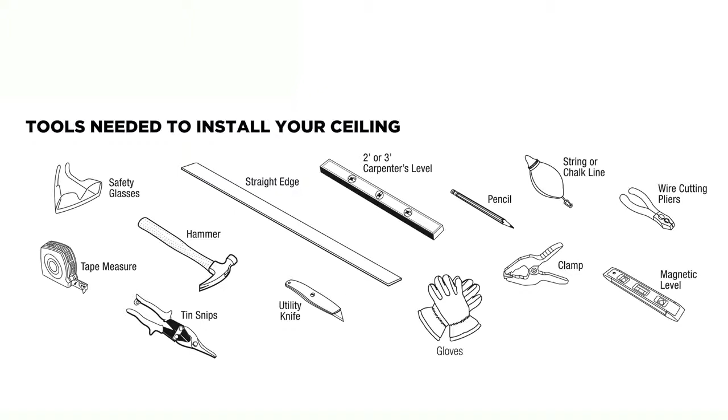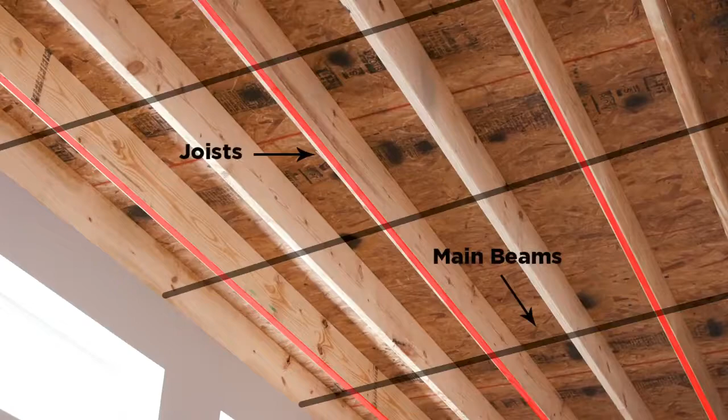Site preparation. Before beginning your installation, you'll need to identify the direction of the joists. Main beams typically run perpendicular to joists. If you have existing drywall, here's how to identify joist direction.

Locate hidden joists using a stud finder or by tapping on the ceiling until you hear a solid thud. Mark this location. Repeat to locate remaining joists. Mark joist locations with chalk lines.

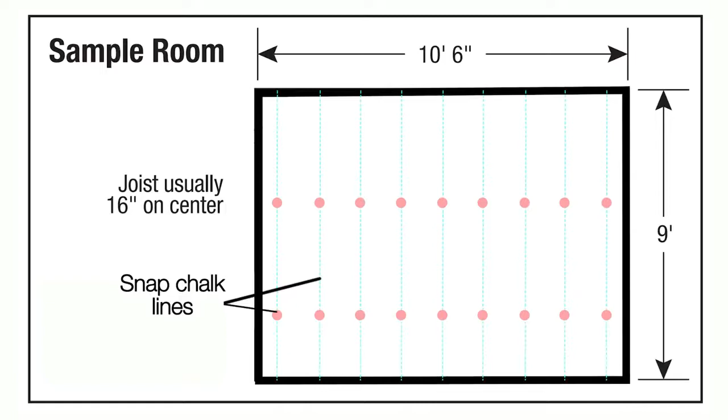Planning your layout. We recommend creating a layout of your ceiling before beginning your project. Visit the drop ceiling calculator on our website for additional guidance.

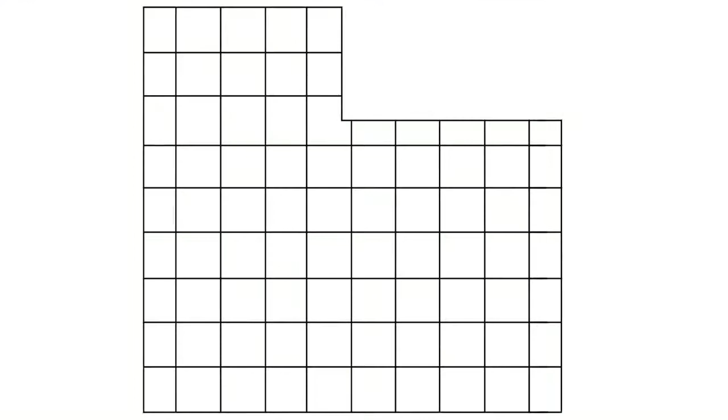For the best appearance, border panels should be the same size on opposite sides of the room and as large as possible. Use your room dimension and the following formulas to plan your space. Pause the video here to review the worksheets.

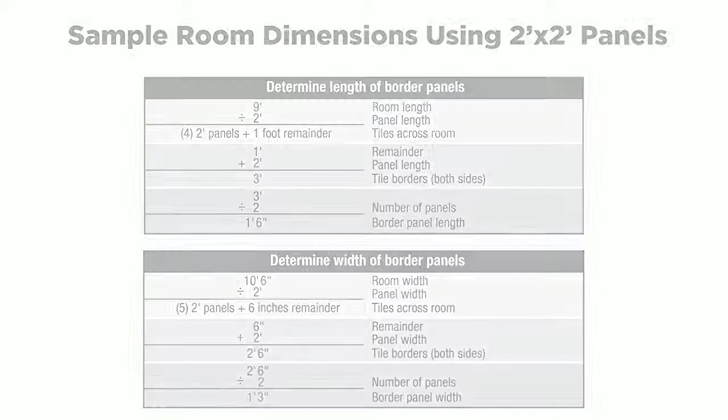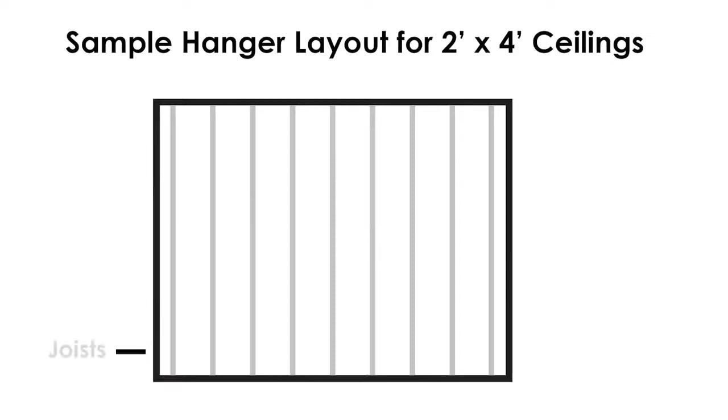Hanging point layout. Now that you have your tile layout planned, you'll need to lay out and mark your hanging points. These hanging points will support your main beams. The first row of main beams in a 2-foot by 4-foot panel installation should be hung the width of the border panel size away from the wall.

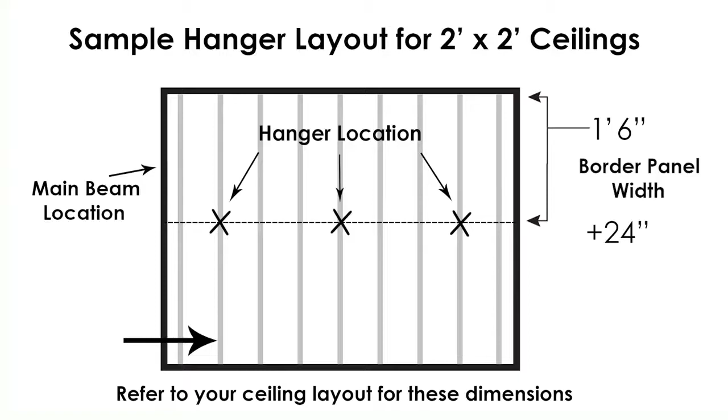In a 2-foot by 2-foot panel installation, the first row of main beams can be hung the width of the border panel or a border panel width plus 24 inches from the wall. Please refer to your ceiling layout for these dimensions. Remember, hanger locations should not be spaced more than 4 feet apart in any direction.

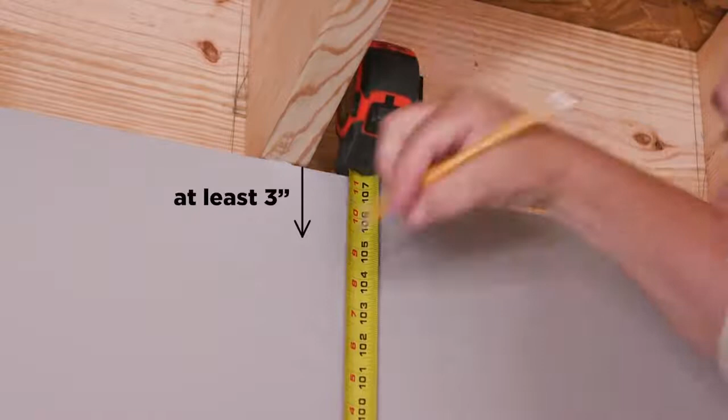Installing wall molding. The first step to installing your grid is establishing your ceiling height. For a typical installation, leave at least 3 inches below joists. This will allow you to get the ceiling panels in and out of the grid more easily. Identify your desired ceiling height. Then, add the height of the wall molding above the desired ceiling height.

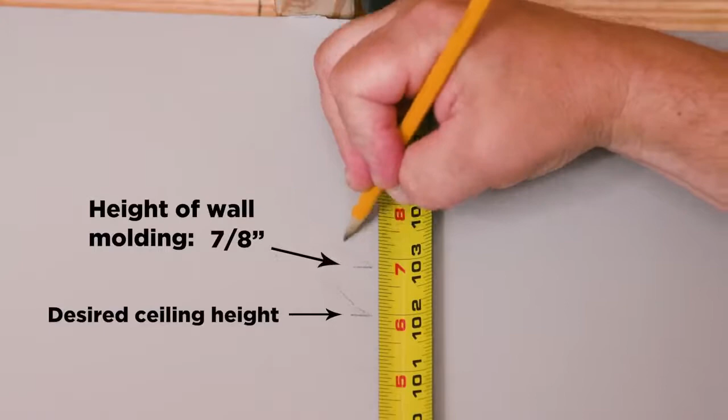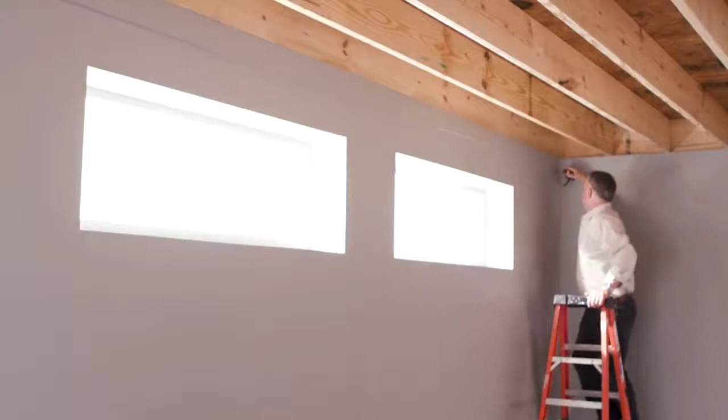Mark a level line where the top of the wall molding will be on 3 walls. This will keep the marks from being visible after your ceiling is installed. Use a string line to mark the 4th wall. Doing this correctly will help ensure that your ceiling plane is level and flat. Tip: the easiest way to establish a level ceiling plane is with a laser level.

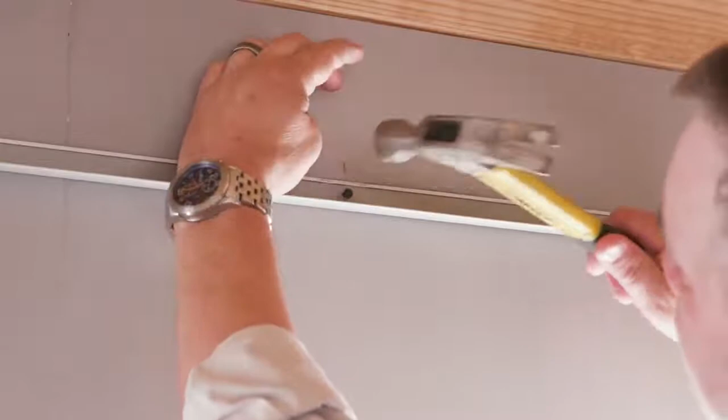Fasten the wall molding to the wall studs every 16 inches to 24 inches on center with the appropriate fastener for your type of stud or wall. If attaching the molding directly to the wall isn't possible, hang a section of main beam next to the wall as a substitute for regular wall molding. It will look the same when the job is complete.

Wall molding corners can be created in 2 different ways. Butt joints are acceptable at inside corners. Outside corners should have a mitered joint.

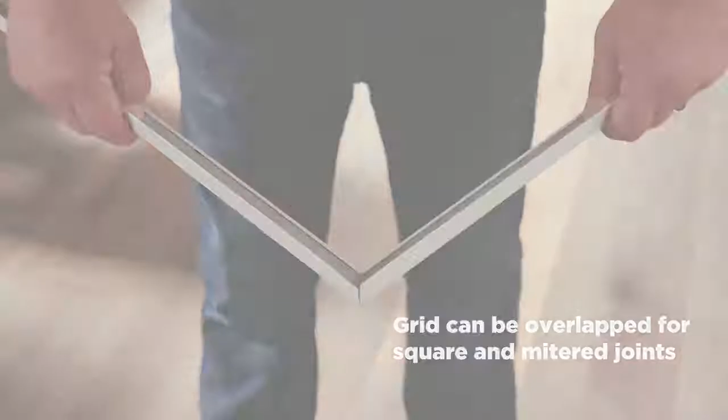Installing hanging hardware. Let's install the hanging hardware. There are multiple choices. Hanger wire. The traditional way to hang a ceiling is with hanger wire and fasteners. Identify the locations of your first main beam and snap a chalk line. Additional main beams will be spaced 4 feet apart.

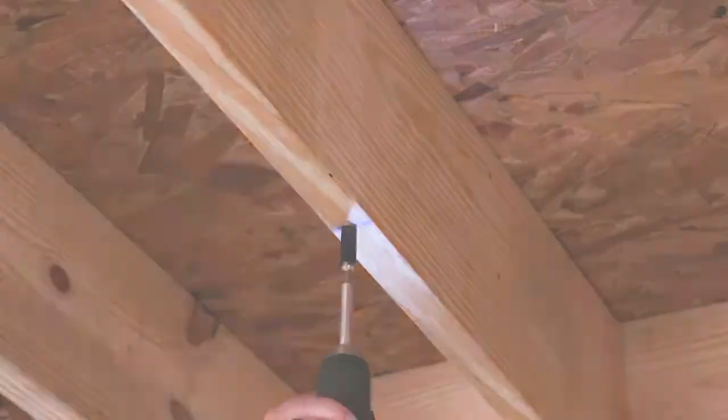Screw the wire fasteners into the joists along that chalk line, a maximum of 4 feet apart. Next, cut the hanger wire so that the length is the distance from your fastener to the top of the molding, plus 1 foot. Pre-bend the hanger wire 6 inches from the end.

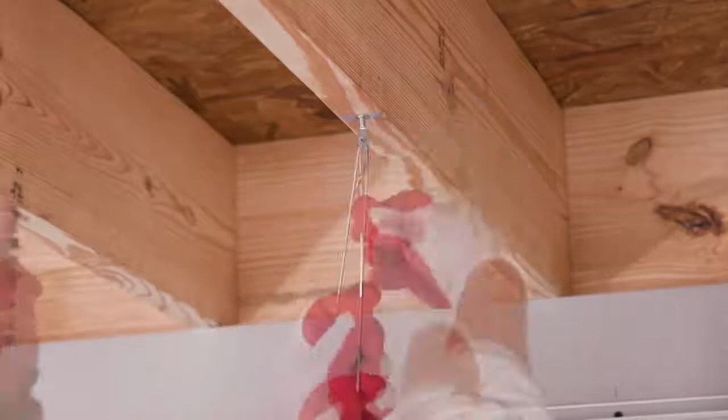Thread the bent end through the fastener and wrap it around itself 3 times. The wire is now securely attached. Do this step for all remaining hanger locations.

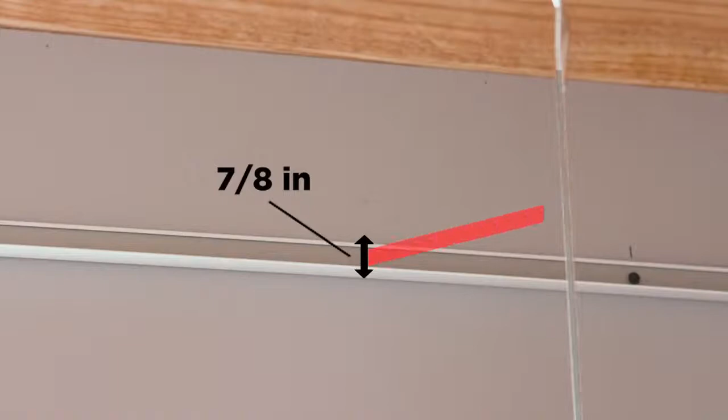Measure 7/8 of an inch from the bottom of the molding and in line with the hanging hardware. Drive a nail into the wall just above the molding. Do the same on the other side of the room. Stretch a leveling string from nail to nail along the row of wires.

Swing hanger wires over to the string line and bend each one at a 90-degree angle where they touch the string. Doing this consistently and accurately will help create a level ceiling.

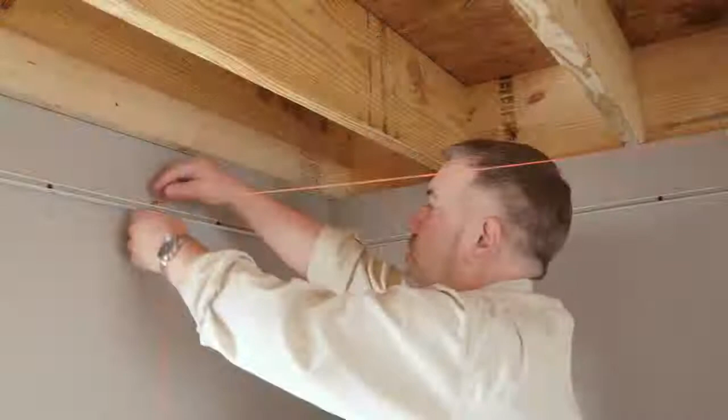Stretch additional leveling string lines to pre-bend other hanger wires. Remove leveling strings after bending the wires. Quick hang hooks and brackets.

There are a few things to keep in mind when using the quick hang hardware. This hardware is designed to be a faster and easier way to install and level a ceiling versus traditional hanger wire. This hardware is for residential use only and is designed for use with solid wood or engineered wood joists. Two hook options allow for ceiling drops from 2.5 inches to 6 inches and 2.5 inches to 12 inches below the bottom of the joists. The hardware is not for use on finished drywall ceilings.

Plan your layout in the same manner you would using hanger wire. The quick hang hardware should be spaced 4 feet apart. Make 1-inch long vertical marks on the side of each joist where the bracket will be located. Use the center hole on the bracket for alignment with the vertical mark. Hammer in the 2 tabs for a temporary hold.

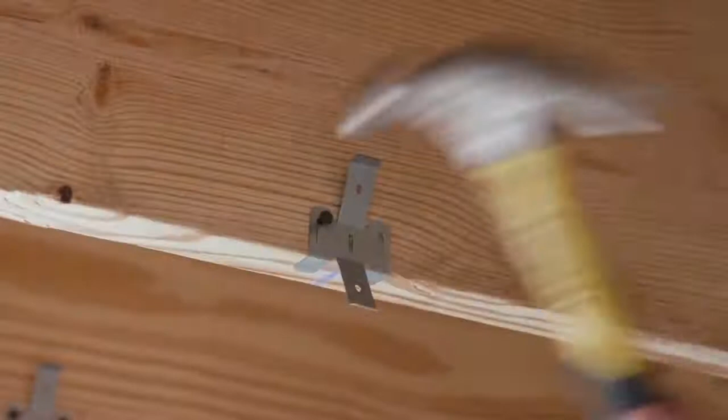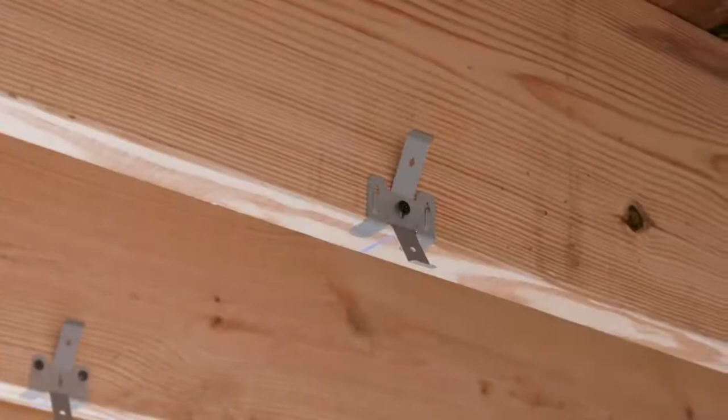Nail the bracket to the joist through the 2 openings above the hammer tabs using the provided nails. You can also attach the bracket to the joist using a single number 5 wood screw through the center alignment hole. With the brackets securely attached to the joist, insert the grid hook using the diamond-shaped holes in the brackets.

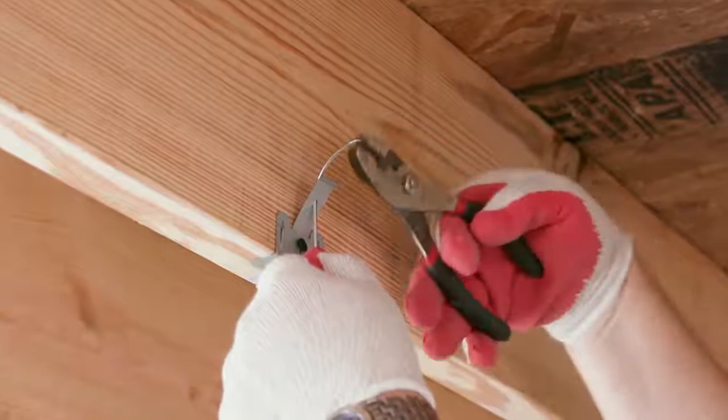Thread the small end of the hook from the back through the lower hole. Push the hook up and rotate to thread through the upper hole, squeezing the spring tabs to allow the wire to go through. Do not cut quick hang hooks. If the hook needs to be shortened due to an obstruction, the top portion can be bent by hand or with pliers. Turn all hooks in the same direction, parallel to the joists.

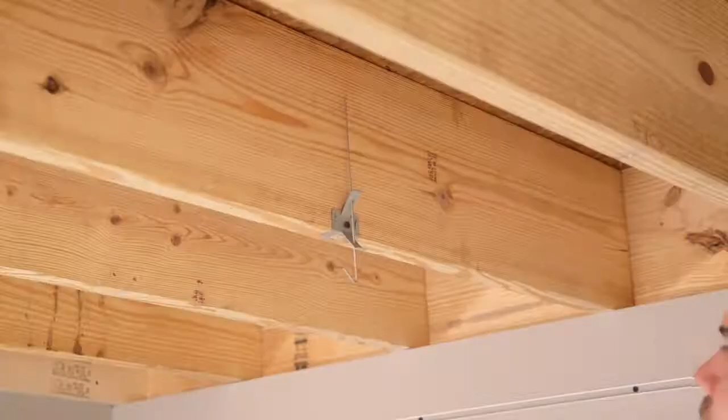Set the hooks at about the same height. The bottom of the hooks should align with the top of the wall molding. To adjust the height of the hook, squeeze upper and lower spring tabs while lifting or lowering the hook. You will do final leveling once all of the grid is installed.

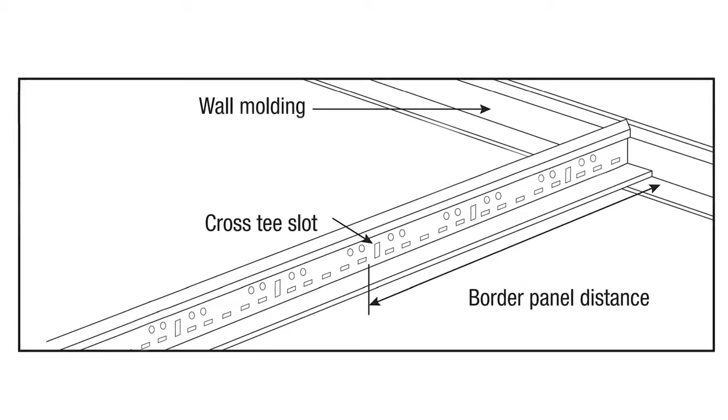Preparing and hanging main beams. You will need to trim the end of the first main beam so that a cross tee slot is a border panel distance from the wall. This first main beam should be closest to the wall. Cut the top of the grid first with tin snips, then bend the grid open and cut the face.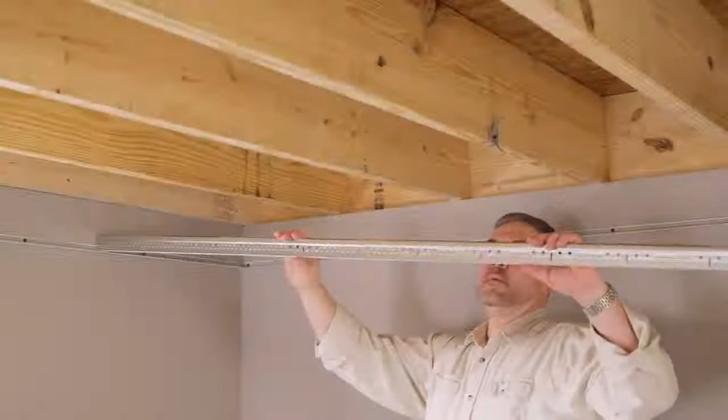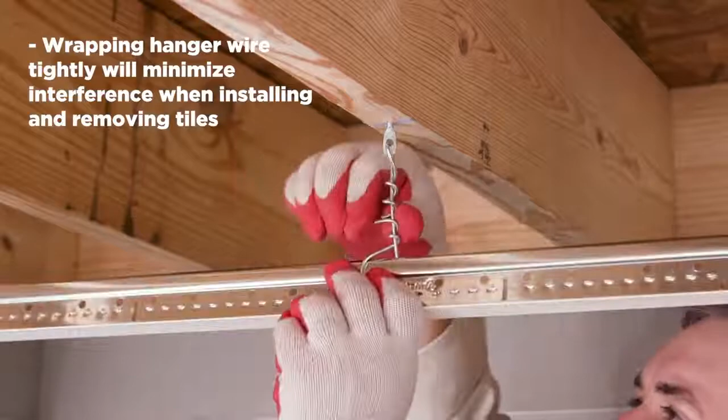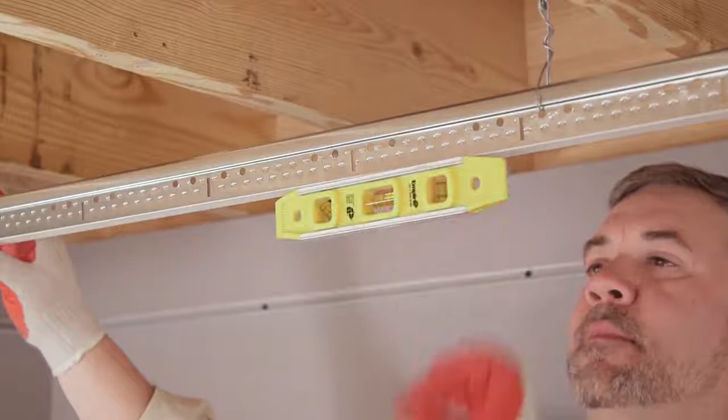Place the cut end of the main beam on the wall molding and using the round hole in the grid, hang the main beam on the hanger wire or quick hang hook. For installations using hanger wire, you will need to bend the wire up and wrap it around itself 3 times. If the holes don't line up, re-bend the hanger wire to align with the nearest hole. Check to make sure your grid is level after rebending the wire. Do this same step for the next main beam, running parallel 4 feet away.

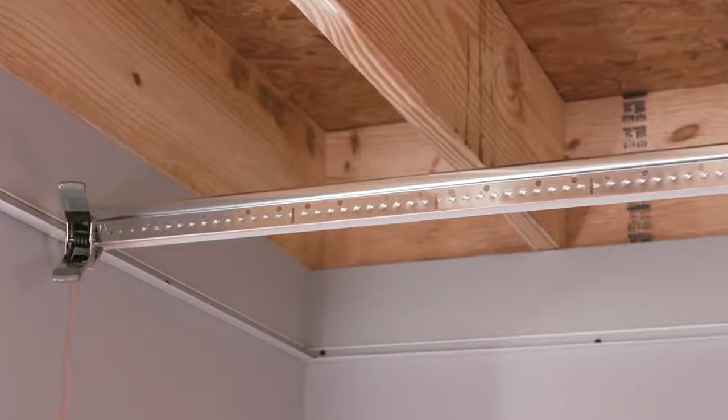Preparing and cutting border cross tees. Stretch a string line from one end of the room to the other, below the wall molding and along the edge of the main beam furthest from the wall of the first main beam. Your first border tee will be positioned a border panel's distance away from the wall. If your main beam is cut correctly, there should be a rectangular slot at this location.

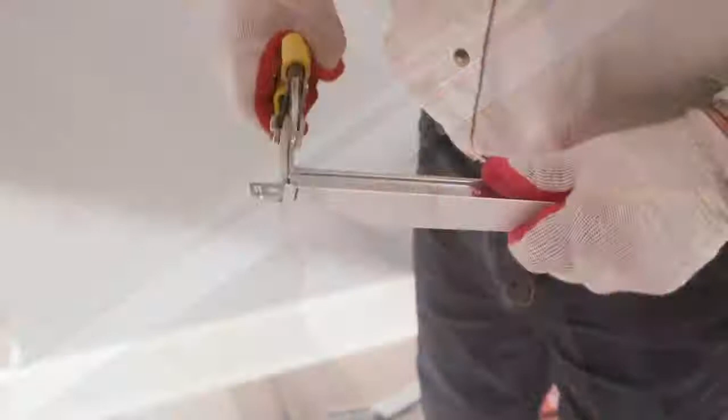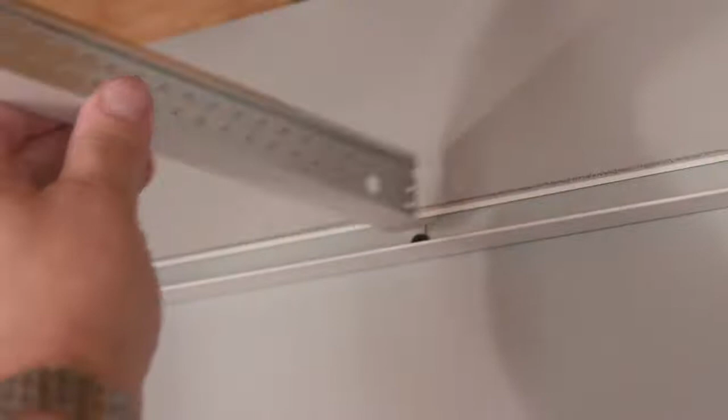To cut the first border tee, hold the end of the cross tee against the wall and then mark and cut the cross tee where it intersects the string line. Insert the uncut end of the cross tee into the main beam through the rectangular hole and rest the cut end of the tee on the wall molding. Repeat these steps for the second border cross tee. You can temporarily fasten the cross tees to the wall molding with a clamp to keep them steady while you square the grid.

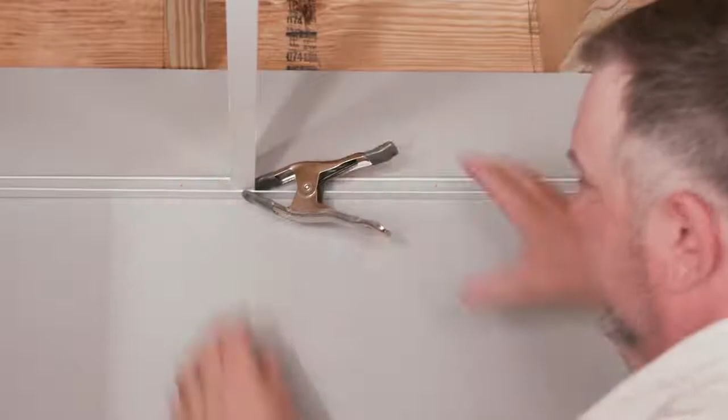Squaring the grid. To achieve the best results, it is important to make sure your grid is square at this point in the installation. This will allow you to adjust if changes are required. Before checking for squareness, you should first install 2 4-foot cross tees between the 2 main beams in line with the first 2 border tees. When connecting 2 cross tees in the same rectangular hole in a main beam, insert the second tee into the slot by passing on the right side of the already installed cross tee.

Installing a cross tee is easier if the tee is inserted into the rectangular slot at a downward angle from above the grid plane. Listen for an audible click to ensure a good connection. To check that your grid is square, measure across the diagonal of the 2-foot by 4-foot opening. The measurement will be the same if the grid is square. If the measurements aren't the same, trim one of the main beams until the diagonals are equal.

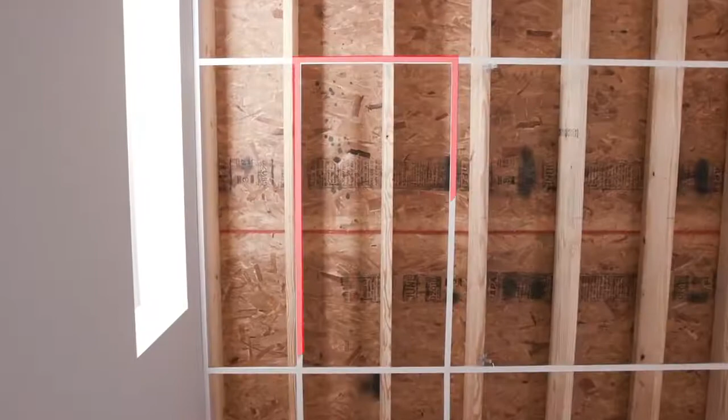Installing remaining grid. Once your grid is square, complete the first 2 rows of main beams by hanging additional main beams from the hanger wires or hooks and joining their ends together. Listen for an audible click to ensure a good connection. At the far end of each of these 2 rows, you'll need to cut both main beams so they rest on the wall molding. Now install all remaining main beams.

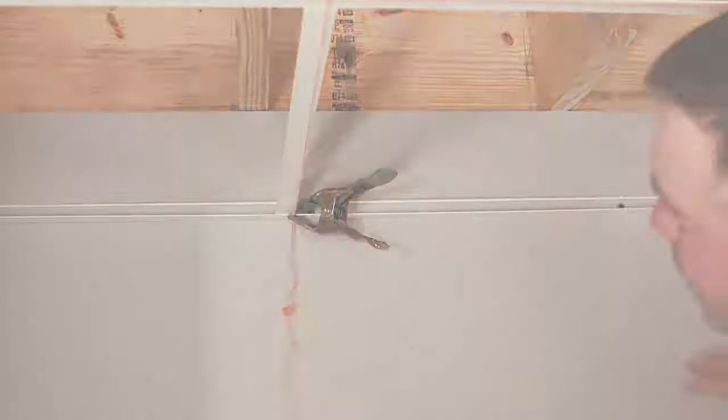Use the leftover ends of the cut main beams to start additional rows of main beams. You will need to trim all starting main beams so a cross-T slot aligns with your already installed cross-Ts. Installing a second guide string perpendicular to your first guide string and in line with your first row of cross-Ts will help identify where you need to cut all remaining main beams. Cut and install all remaining border cross-Ts.

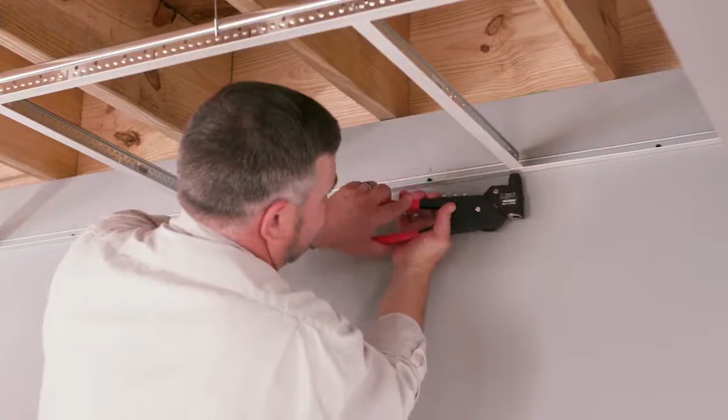Remove the clamps. To lock your grid in place and maintain squareness, we recommend attaching a few cross-Ts to the wall molding with either screws or pop rivets. Now install the rest of the cross-Ts, starting with the 4-foot cross-Ts running perpendicular to the main beams. Install these cross-Ts 2 feet apart to create a 2-foot by 4-foot opening. If you are doing a 2-foot by 2-foot ceiling installation, install 2-foot cross-Ts at the midpoint of the 4-foot cross-Ts.

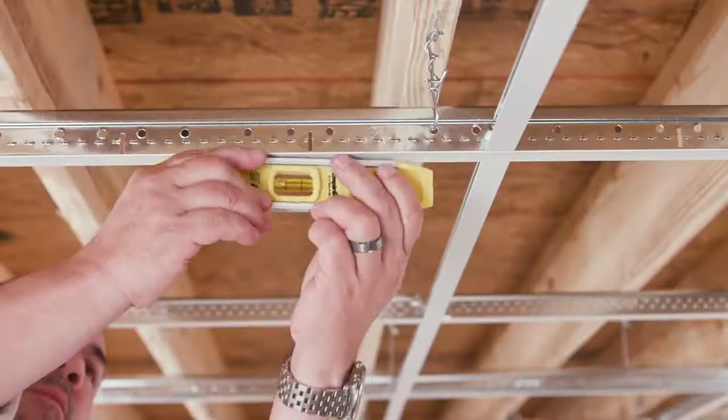Final leveling. If using hanger wire, your grid should be level at this time. Check by using a magnetic level. Unbend and retie wires if adjustments are required. If you are using quick hang hardware, start with your first installed main beam in the corner of the room with a magnetic level and adjust as needed. Continue working your way across the room by squeezing the adjustable tabs and raising or lowering the hooks until your system is level.

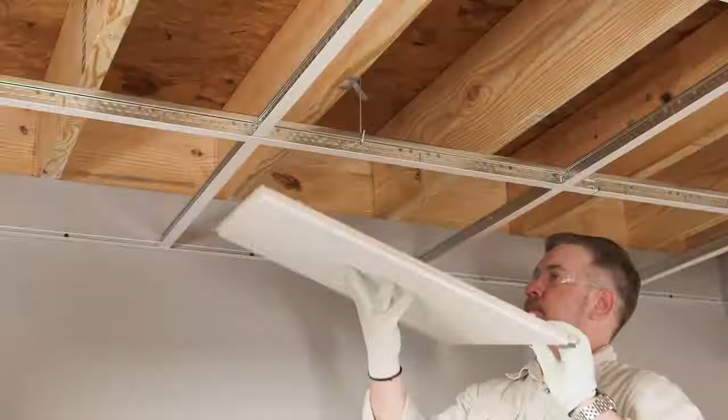Installing ceiling panels. Wear clean gloves or wash your hands before you handle the ceiling panels to prevent dirt smudges on the tiles. Lift the panel at an angle up through the grid. Gently drop into place. Remember, mineral fiber panels can be delicate and should be handled with care. Avoid dragging the face or edges of the panels against the grid. Start with border panels and work towards the center of the room.

If a tile cannot be installed in this manner, an adjacent cross-T can be removed to allow the tile to be positioned. The cross-T should then be reinstalled. If there's an obstruction in the area where you are inserting a ceiling tile, you may need to lift the ceiling tile through an adjacent opening and gently move it across the back of the grid into place.

Cutting border tiles. Border tiles will likely need to be trimmed. Use a straight edge and cut the panels face up. For tegular edge tiles, you will need to cut the edge that's resting on the wall molding to allow it to lay flat. Cutting tegular edge tiles. First, trim tegular edge border panels to the same dimensions as for flat panels. The tegular edge must now be cut into the panel.

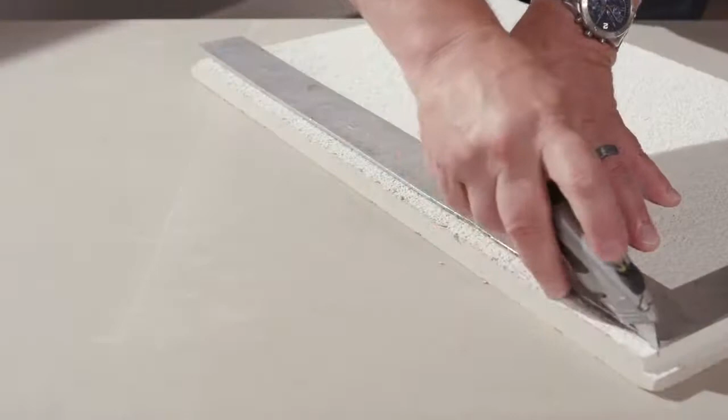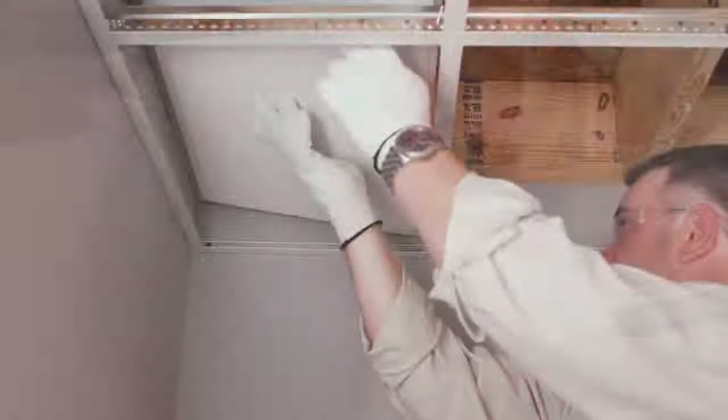Set the panel into the grid face side down. Draw a light pencil line on the panel using the wall molding as a guide. Remove the panel. Use a sharp utility knife and straight edge to cut halfway through the panel from the face side along the pencil line. Lay the utility knife on its side next to the panel and, with the panel face up, cut into the panel at the tegular edge height to the depth of the first cut. Discard the cut material. If the cut edge of the panel is still visible when installed, paint with a flat white latex paint and install.